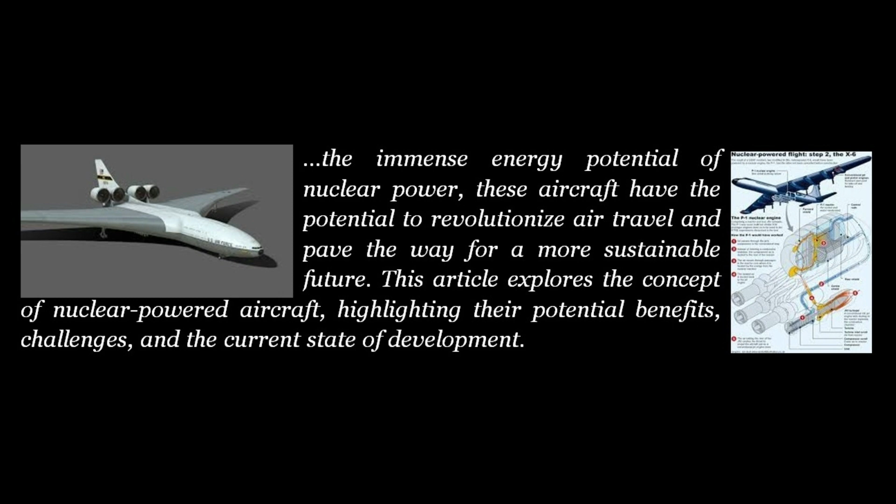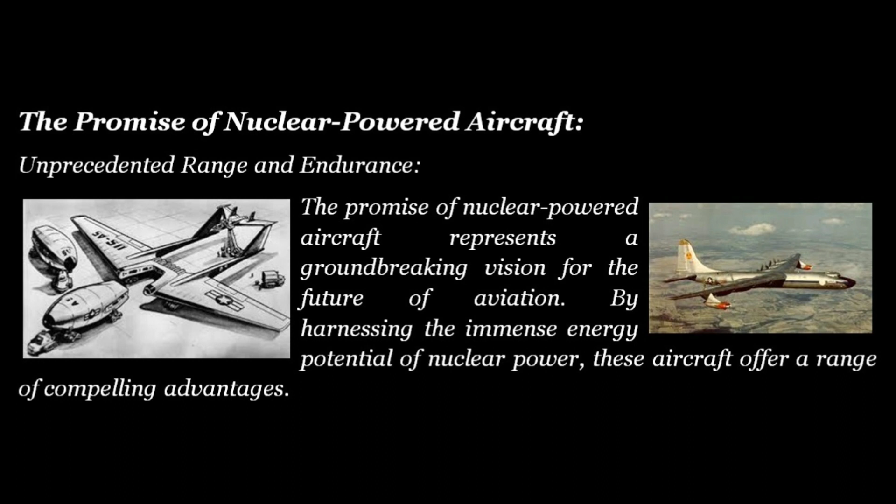The promise of nuclear-powered aircraft: unprecedented range and endurance. This represents a groundbreaking vision for the future of aviation. By harnessing the immense energy potential of nuclear power, these aircraft offer compelling advantages. Firstly, they boast virtually unlimited range and endurance. Unlike conventional aircraft that rely on fossil fuels and require frequent refueling, nuclear reactors provide a continuous and abundant source of power, enabling long-haul flights without refueling stops.

Moreover, nuclear-powered aircraft have the potential to significantly reduce the environmental impact of aviation. By replacing conventional jet engines with nuclear reactors, carbon emissions can be drastically reduced or even eliminated. This aligns with global efforts to combat climate change and achieve carbon neutrality.

Secondly, the efficiency of nuclear-powered aircraft is also a notable advantage. With higher energy density compared to traditional aviation fuels, these aircraft can achieve higher speeds and improved overall performance. Shorter flight times, increased passenger capacity, and enhanced productivity are all potential benefits that could transform the air travel experience.

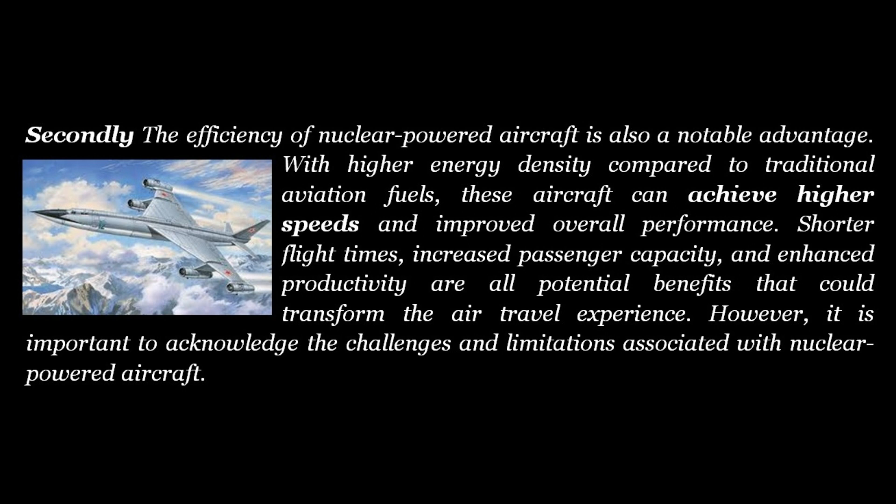However, it is important to acknowledge the challenges and limitations associated with nuclear-powered aircraft. Safety concerns, regulatory hurdles, and technological complexity must be addressed before these aircraft become a reality. Ensuring the safe operation and containment of nuclear reactors within an aircraft, establishing robust regulations, and overcoming technical obstacles are critical steps toward nuclear-powered aviation.

While no fully operational nuclear-powered aircraft has yet taken to the skies, ongoing research and innovation in nuclear and aerospace technologies hold the potential to bring this visionary concept to fruition. By addressing the challenges and advancing our understanding of nuclear-powered aviation, we can unlock a future where air travel is not only sustainable but also offers unprecedented capabilities. This promise offers a glimpse into a future where long-range, emission-free flights are a reality, revolutionizing the way we travel and paving the way for a greener aviation industry.

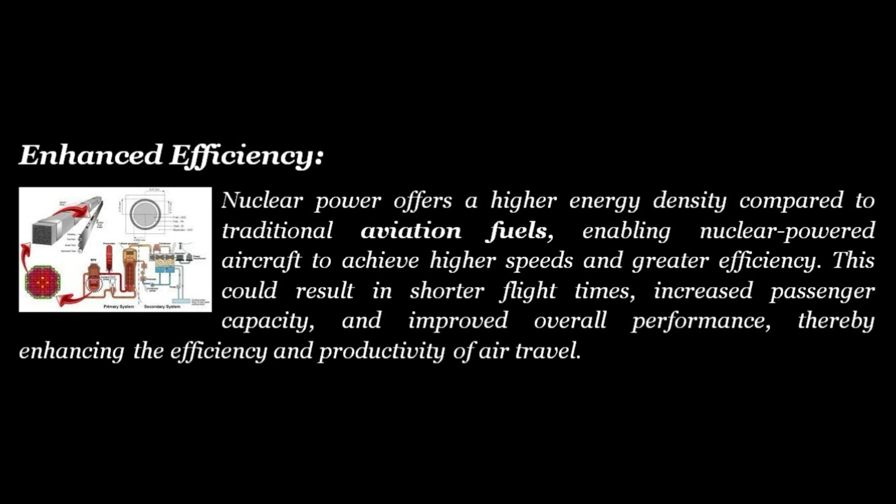Enhanced efficiency. Nuclear power offers a higher energy density compared to traditional aviation fuels, enabling nuclear-powered aircraft to achieve higher speeds and greater efficiency. This could result in shorter flight times, increased passenger capacity, and improved overall performance, thereby enhancing the efficiency and productivity of air travel.

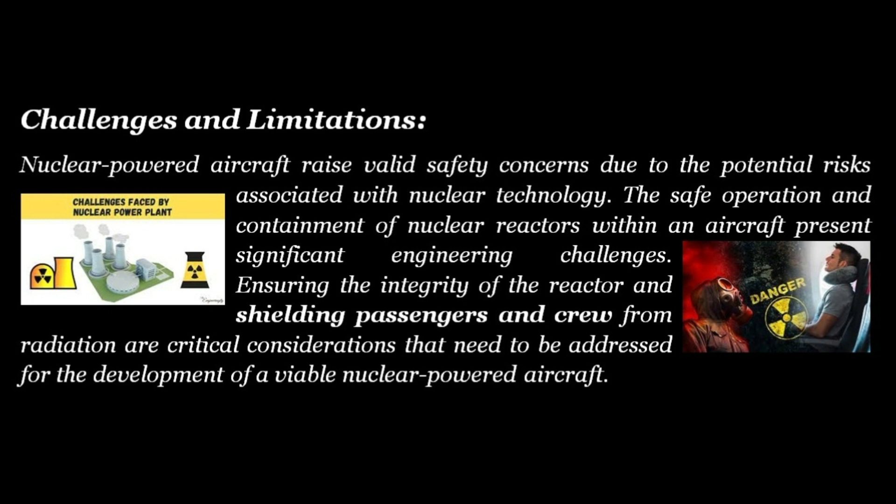Challenges and limitations. Nuclear-powered aircraft raise valid safety concerns due to the potential risks associated with nuclear technology. The safe operation and containment of nuclear reactors within an aircraft present significant engineering challenges. Ensuring the integrity of the reactor and shielding passengers and crew from radiation are critical considerations that need to be addressed for the development of a viable nuclear-powered aircraft.

Regulatory hurdles. Introducing nuclear-powered aircraft into commercial aviation would require a robust regulatory framework to address safety, security, and environmental concerns. International cooperation and agreements would be essential to establish uniform standards and regulations governing the use of nuclear power in aviation.

Technological complexity. Developing nuclear-powered aircraft is a complex engineering endeavor. Overcoming technical challenges related to the miniaturization and efficient operation of nuclear reactors within the confined space of an aircraft remains a significant obstacle. Moreover, developing advanced propulsion systems capable of harnessing the energy generated by nuclear reactors requires extensive research and innovation.

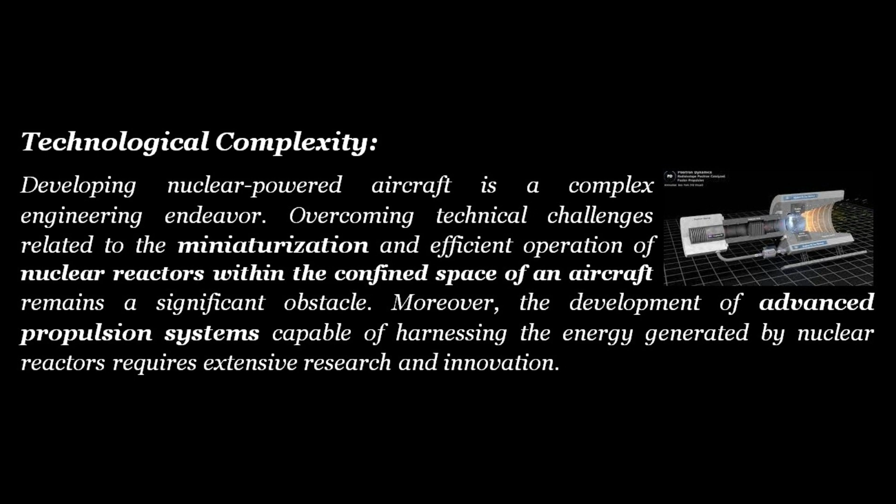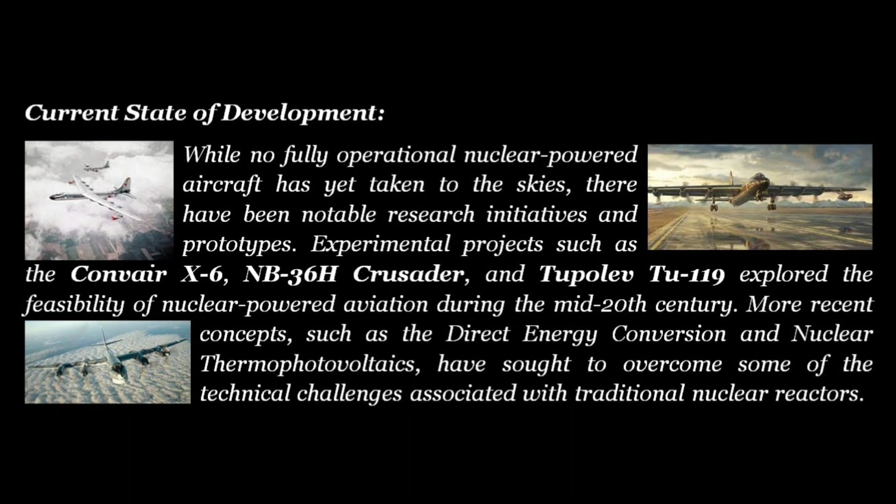Current state of development. While no fully operational nuclear-powered aircraft has yet taken to the skies, there have been notable research initiatives and prototypes. Experimental projects such as the Convair X-6, NB-36H Crusader, and Tupolev Tu-119 explored the feasibility of nuclear-powered aviation during the mid-20th century. More recent concepts, such as direct energy conversion and nuclear thermophotovoltaics, have sought to overcome some of the technical challenges associated with traditional nuclear reactors.

Nuclear-powered aircraft represent a compelling vision for the future of aviation, offering the potential for unlimited range, reduced environmental impact, and enhanced efficiency. However, numerous challenges, including safety concerns, regulatory hurdles, and technological complexity, must be addressed before these aircraft become a reality. As research and innovation in nuclear and aerospace technologies continue to advance, nuclear-powered aircraft may find their place as a sustainable and efficient mode of air travel, shaping the future of aviation and contributing to a greener planet. Exploring the potential: a list of nuclear-powered aircraft.

The world of aviation has witnessed remarkable advancements over the years, with constant innovations aimed at enhancing efficiency, range, and sustainability. One intriguing concept that has captured the imaginations of engineers and aviation enthusiasts alike is nuclear-powered aircraft. By harnessing the immense energy potential of nuclear power, these aircraft could potentially revolutionize air travel. This article aims to present a comprehensive list of nuclear-powered aircraft designs that have been explored or proposed throughout history.

Convair X-6. One of the earliest nuclear-powered aircraft concepts, the Convair X-6 was designed in the 1950s as part of the United States Air Force's Nuclear Energy for the Propulsion of Aircraft (NEPA) program. It was envisioned as a strategic bomber capable of flying intercontinental distances without refueling. However, the project was ultimately cancelled due to concerns over safety, feasibility, and cost.

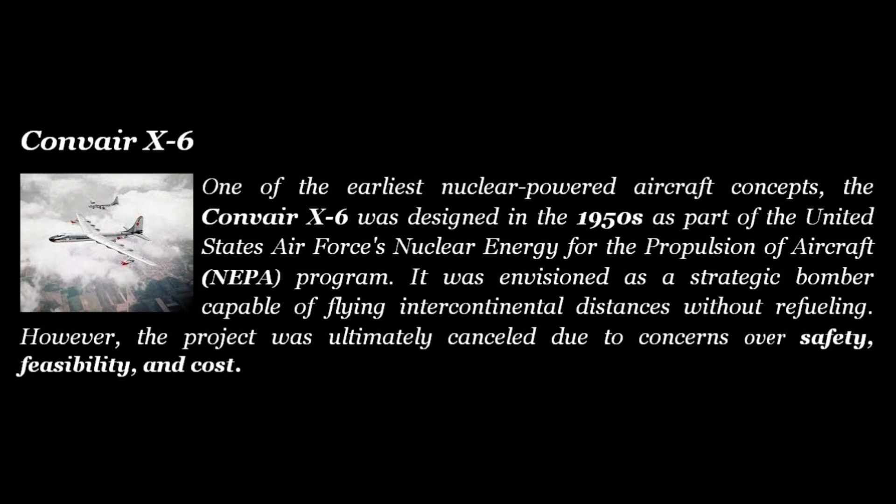NB-36H Crusader. The NB-36H Crusader was an experimental aircraft developed by the United States during the Cold War era. It was a modified version of the B-36 bomber, equipped with an operational nuclear reactor. The reactor powered a heat exchanger, which in turn drove the aircraft's turboprop engines. Although the NB-36H successfully completed a series of test flights, the project was eventually terminated due to safety concerns and the advent of more efficient jet engines.

Tupolev Tu-119. During the 1960s, the Soviet Union explored the idea of nuclear-powered aviation with the Tupolev Tu-119. It was essentially a modified Tu-95 strategic bomber, equipped with a nuclear reactor. The reactor provided power for both propulsion and onboard systems. However, the Tu-119 never flew with an operational reactor and was used solely for ground testing purposes.

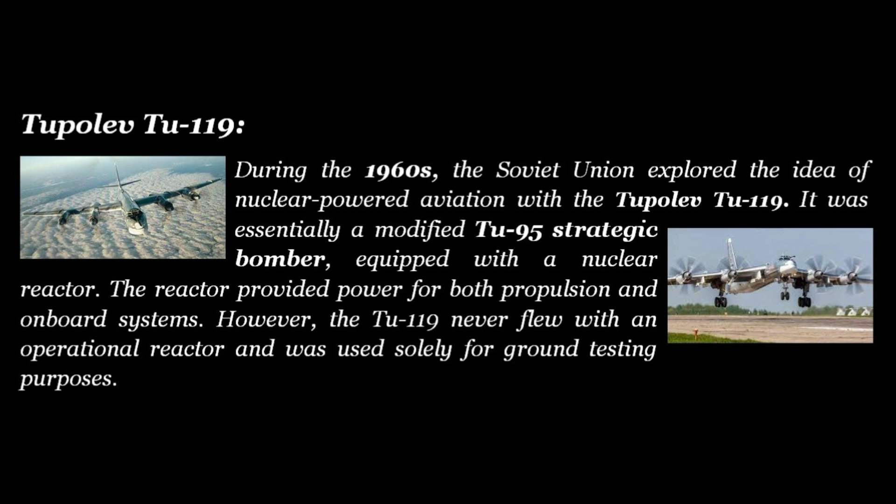Project Pluto. Project Pluto was a highly ambitious and unconventional American endeavor in the 1960s. It aimed to create a nuclear-powered, unmanned cruise missile capable of delivering nuclear warheads. The missile, known as SLAM, Supersonic Low-Altitude Missile, utilized a nuclear-powered ramjet engine. Despite successful ground tests, the project was ultimately abandoned due to concerns over safety, environmental impact, and the evolution of intercontinental ballistic missile technology.

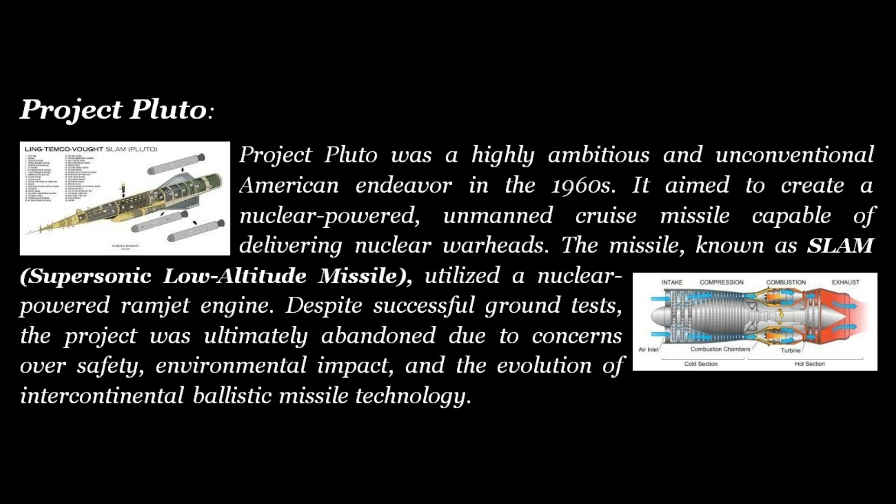Mikoyan-Gurevich MiG-105. The Mikoyan-Gurevich MiG-105, also known as the Spiral, was a Soviet experimental spaceplane developed during the 1960s and 1970s. It featured a unique lifting body design and was intended to be launched vertically using rocket boosters. The spacecraft's propulsion system was proposed to include a combination of liquid hydrogen and a nuclear-powered ramjet engine. However, the nuclear-powered variant of the MiG-105 never progressed beyond the initial design stage.

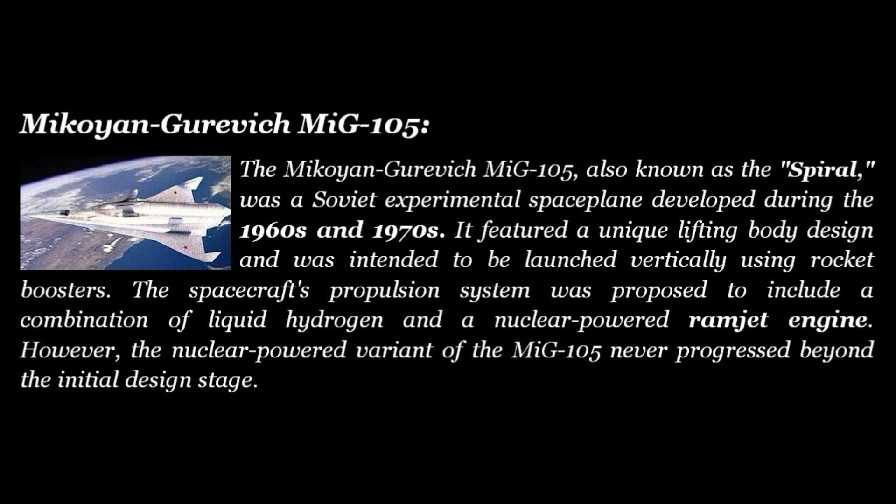Project Orion, conceived in the late 1950s, was a groundbreaking proposal for a nuclear-powered spacecraft rather than a conventional aircraft. It aimed to utilize nuclear explosions for propulsion by detonating small nuclear bombs behind the spacecraft. The force generated from the explosions would propel the spacecraft forward. Although the concept was highly innovative, it was never fully developed due to international treaties banning nuclear explosions in space.

Bussard Ramjet. The Bussard Ramjet, named after physicist Robert W. Bussard, was a concept proposed in the 1960s for an interstellar spacecraft. While not a conventional aircraft, the Bussard Ramjet concept involved using a large electromagnetic field to collect interstellar hydrogen as fuel. A nuclear fusion reactor would then heat the collected hydrogen, creating thrust for propulsion. Despite its potential, significant technological challenges and feasibility concerns have prevented the realization of a functioning Bussard Ramjet.

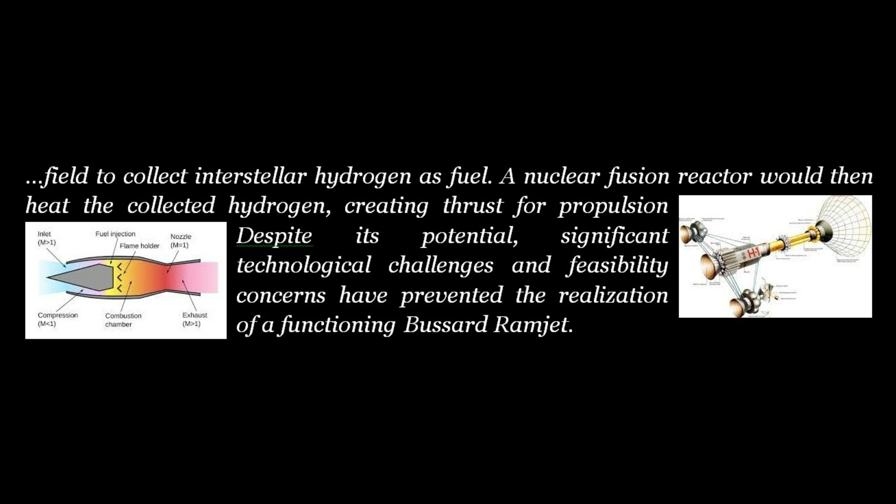Dassault Mirage 4000N. In the 1980s, France explored the idea of a nuclear-powered variant of the Dassault Mirage 4000 fighter aircraft. The proposed design involved incorporating a compact nuclear reactor to provide propulsion and electricity for onboard systems. However, the Mirage 4000N project did not advance beyond the conceptual stage, as the practical challenges associated with nuclear reactors on board fighter jets posed significant safety and operational concerns.

Project Pluto II was a revival of the original Project Pluto concept mentioned earlier. In the 2000s, the United States revisited the idea of nuclear-powered propulsion for a supersonic cruise missile. The project aimed to develop a compact nuclear reactor that would power an air-breathing scramjet engine, offering extended range and endurance. However, the project was cancelled due to shifting priorities and the inherent complexities involved in deploying nuclear technologies in military applications.

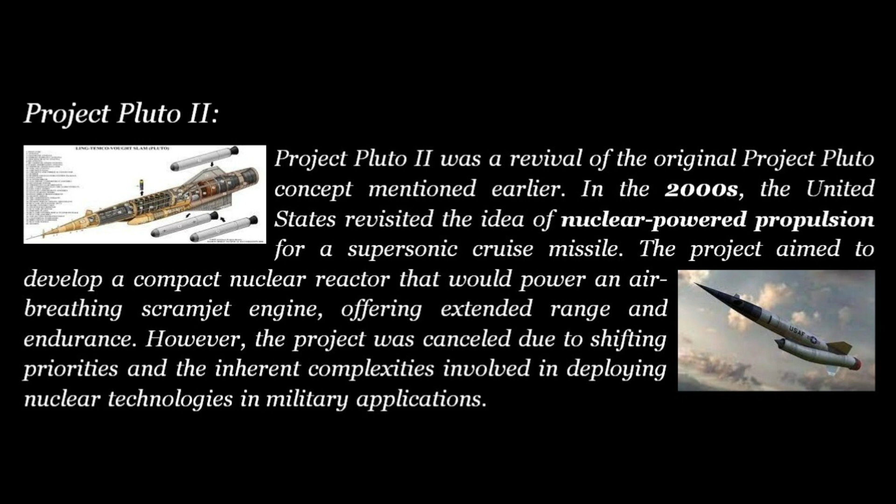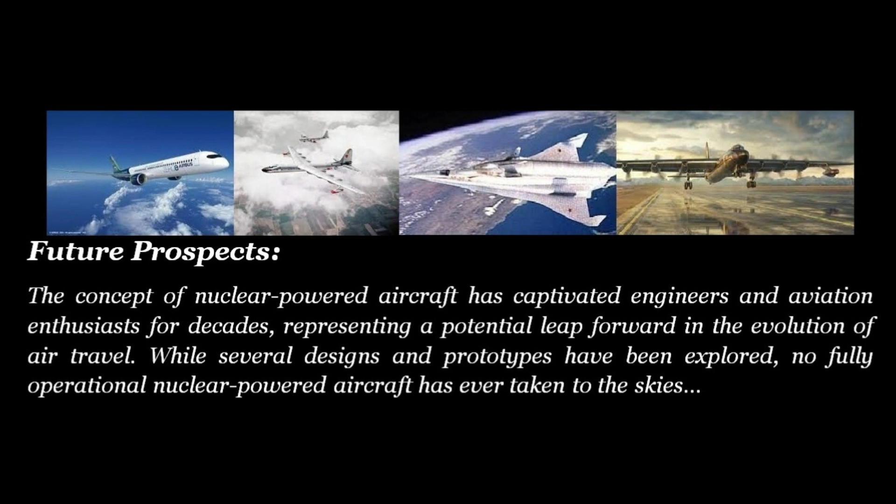Future prospects. The concept of nuclear-powered aircraft has captivated engineers and aviation enthusiasts for decades, representing a potential leap forward in the evolution of air travel. While several designs and prototypes have been explored, no fully operational nuclear-powered aircraft has ever taken to the skies. Challenges related to safety, environmental concerns, and cost-effectiveness have impeded the realization of these ambitious projects. Nevertheless, the research and development efforts in this area have contributed to the advancement of other aerospace technologies and continue to inspire future generations of engineers to push the boundaries of aviation innovation.